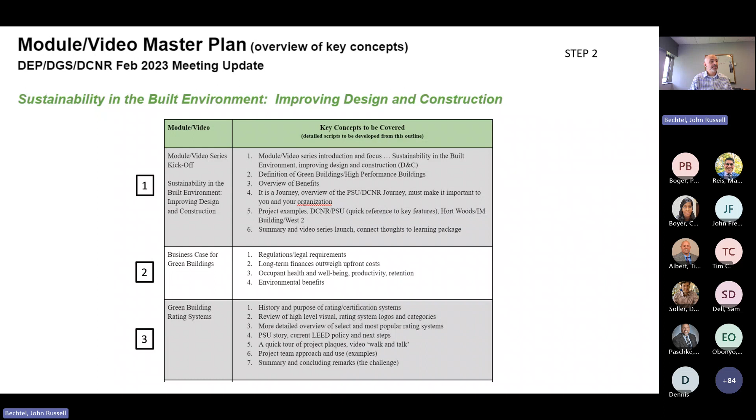to really frame out each of these. Are we covering the right topics that are necessary for a Sustainable Design and Construction 101 video series? So we did spend some time on this, working with our partners and making sure that we did have the right concepts across these 11 topics.

And then, of course, as a project manager, we had to develop a schedule. The first step, obviously, is the development of the script. After we got the topics outlined and the key concepts, we made assignments across all of our partners that we were working with, and we began to develop detailed scripts. So that was the first step before you would enter production of a video.

Of course, there's mapping out when the scripts were done. The scripts went through some level of approval process across the partnership. Once those approvals were done, then we would get into the studio. So from script to actually having a video to watch and review took months, sometimes 3 to 4 months. A lot of us were new at this, and we did learn a lot through this process.

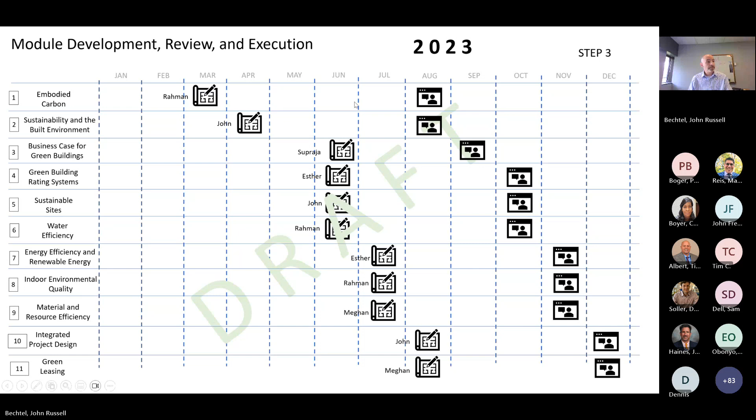And I'll show you some examples of some scripts that we developed, just quickly. And then I will show you a couple of excerpts of the final product to give you a feel for what we produced. So here's an example of a detailed script that was developed for the water efficiency.

Of course, timing was important in terms of trying to keep these videos to 5 minutes to 20 minutes, somewhere in between. At first, we thought they would all be short 6-7 minute videos. But as we started to tackle each of these topics, they grew in length. I think one of my videos was about 16 minutes. Trying to reduce that now.

But the timing and then who narrates it, trying to have a variety of speakers, making sure that they were interesting, and having the right experts to speak to them. And then having some type of visual as well, and not just speakers talking, but more of a lecture type with a PowerPoint with visuals coming up. And then detailed narration had to be developed for each of these.

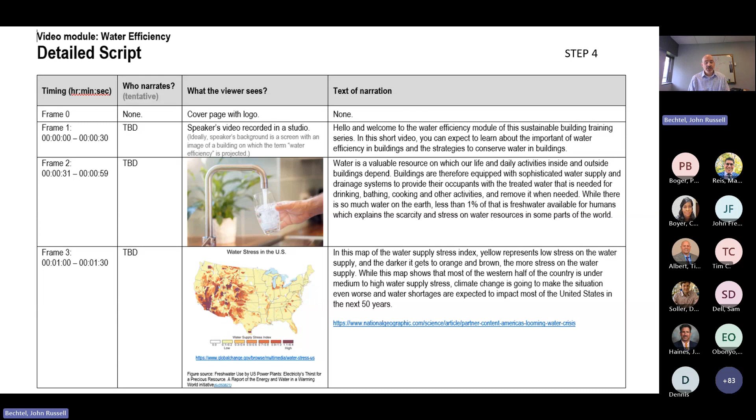So this just gives you an example of what kind of happened behind the scenes before we went into the studio to develop the actual video, to frame it out with visuals and then the exact content that you wanted to cover. And this is another one here, integrated project design. And you see some of the level of detail required there as well.

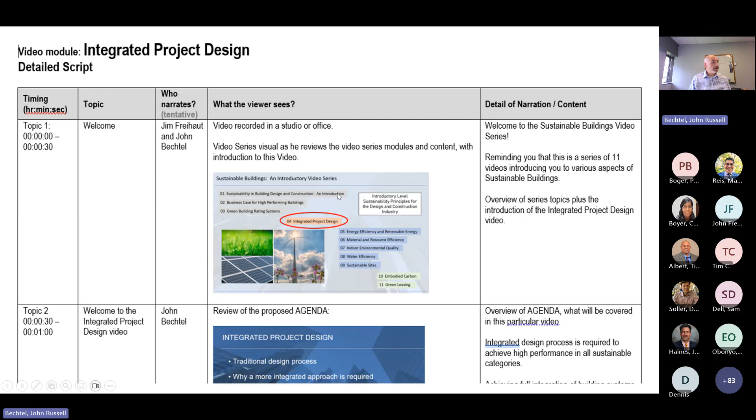And then I'd like to show you some of the final product. This is just a transition slide here. This is in our Icon lab here at Penn State, where we're trying to do a lot of our integrated project design for our projects.

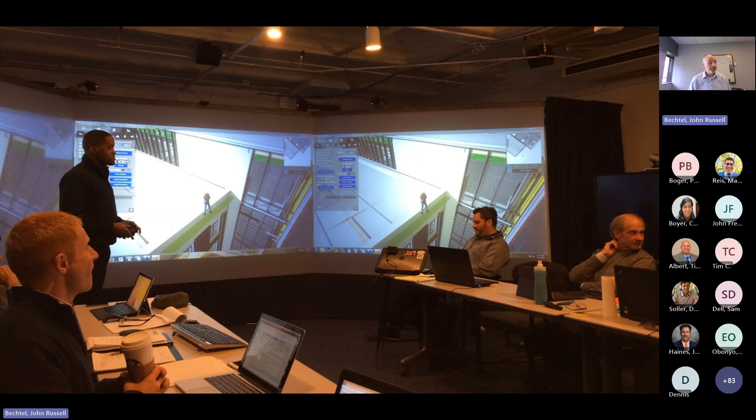So what I'd like to do now is actually show you some excerpts from the final products. First, I will show you an excerpt from the embodied carbon video, just to give you a feel for that one. And then I'll show you a minute or two of the integrated project design video. And Esther, if you wanted to chime in on anything there as I pull up these videos, feel free.

Okay, so I'll be the commercial break while he's doing this. Are you ready? Yeah, I'm getting there.

Yeah, so one of the things that we all realized is having the technical content and then delivering it effectively, those are not the same thing. So when John says it took a long time and several iterations, it was down to like going back to the studio 3-4 times, sometimes for large sections, other times for small sections. So we greatly appreciated the value of feedback and iteration because we could cut clips that we think could be worked on a little bit more until everyone was satisfied, both on our end and on the side of the client. Over to you, John. You got it.

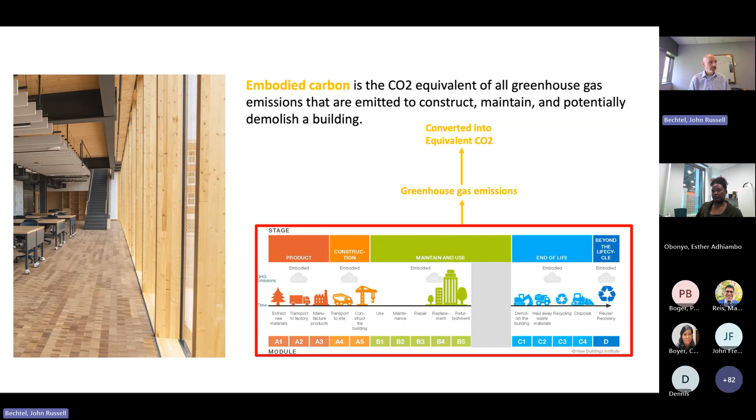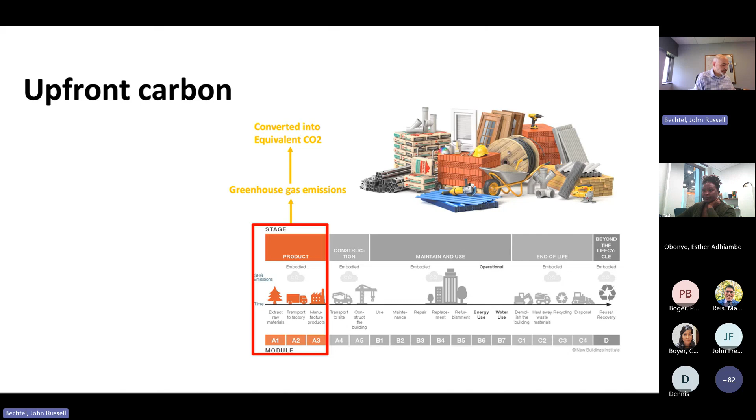Hello and welcome to the Embodied Carbon module of the Sustainable Building Training series. In this short video, you can expect to learn about what embodied carbon is, why it is important, and how we can reduce it in buildings. Embodied carbon considers all greenhouse gas emissions that are emitted in the full life cycle of the building, from extraction of raw materials through transportation, manufacturing, construction, maintaining and replacement, potential demolition, and its future life. As you might guess, every construction material has an embodied carbon figure or value attached to it, even before it is used in buildings. This is called upfront carbon or cradle-to-gate embodied carbon and includes all carbon dioxide emissions during the manufacturing processes of a certain construction material before the material is transported to the construction site.

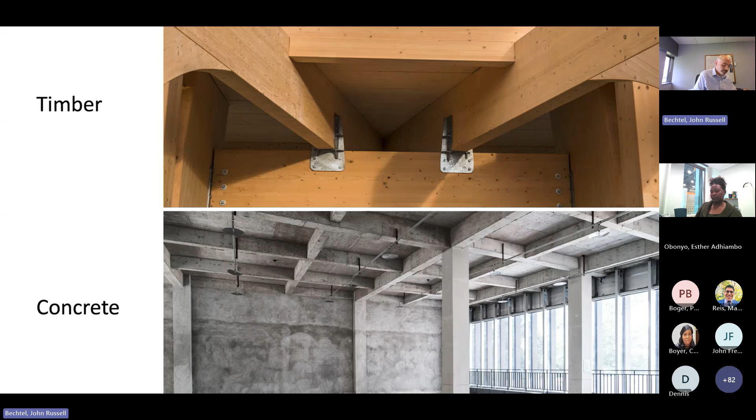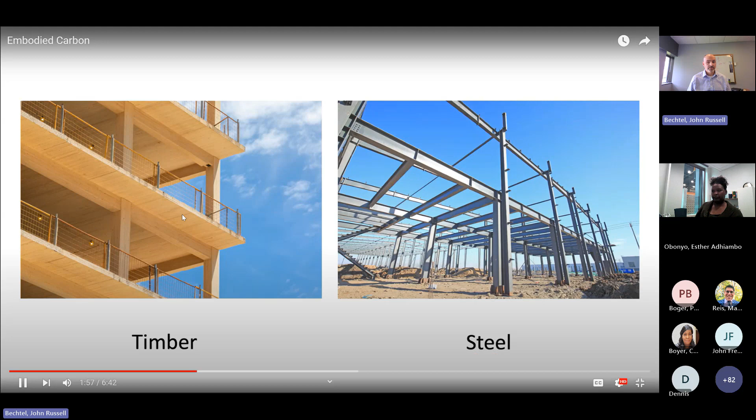Upfront carbon varies from material to material. A timber beam, for example, has lower embodied carbon than a concrete beam carrying the same structural loads. This is mainly because the production of timber is less energy and carbon intensive. Similarly, a building made with timber superstructure would have a very different embodied carbon than a building made with a steel structure. In discussions about embodied carbon, you also might hear about operational carbon. Operational carbon is different than embodied carbon, as operational carbon is about all carbon dioxide emissions from the energy and electricity we consume to keep our buildings warm, cool, illuminated, and powered. Operational carbon can be reduced by strategies such as making buildings super insulated and airtight.

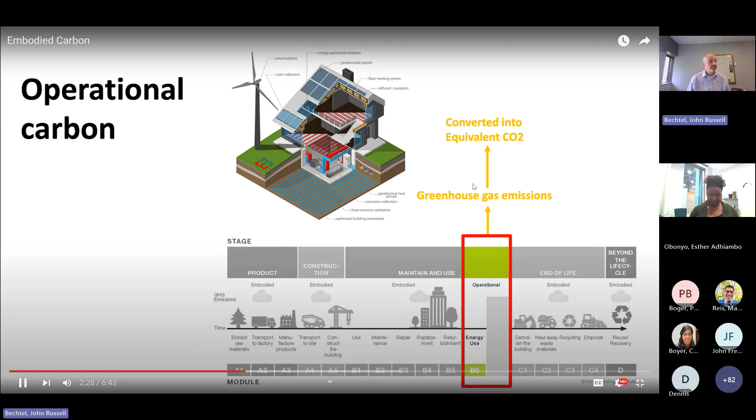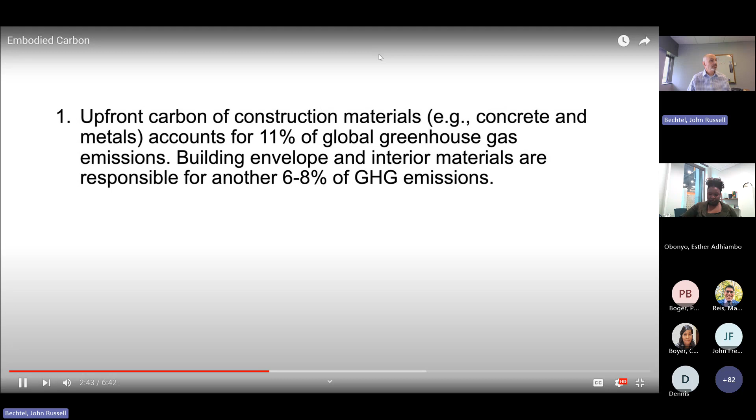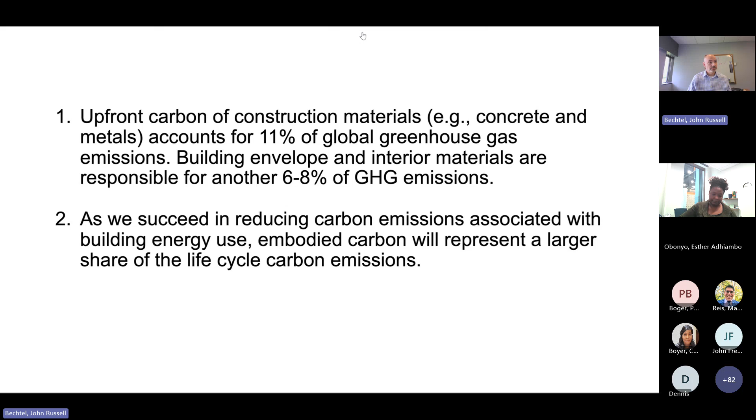The question is now why we should care about embodied carbon. The first reason is that the upfront carbon of materials used in construction, such as concrete and metals, is responsible for 11% of greenhouse gas emissions globally, according to the United Nations Environment Program data. Building envelope and interior materials are estimated to be responsible for roughly another 6 to 8%. The second reason is that the share of embodied carbon in buildings' carbon footprint is going to increase as buildings are going to become more and more energy efficient in future decades. For example, in a net zero energy building, between 75 and 100% of the life cycle carbon emissions will be caused by embodied carbon.

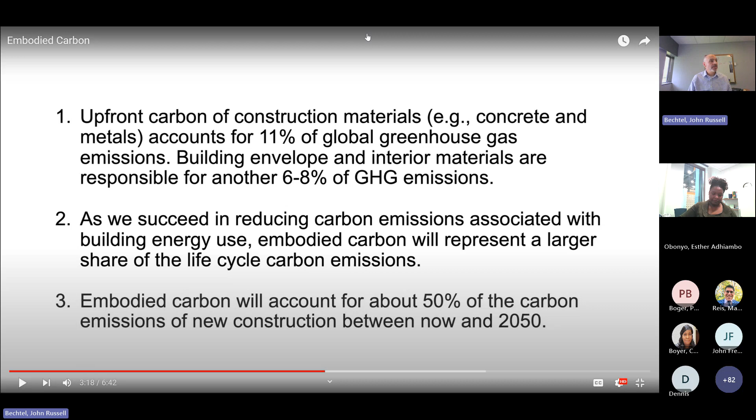Okay, I'll stop there. I just wanted to give you an idea of one of the videos. I'll stop sharing here.

You wanted to watch more, didn't you? I hope so.

Now we'll show an excerpt from the integrated project design video. And it's very difficult to watch yourself on video, but I'm going to try. So I'll share this one, just show you maybe a minute or two. And this is about 8 minutes in on this one.

One practice you can utilize on a project to promote a more integrated design approach is target value delivery, TVD, as promoted by the Lean Construction Institute, LCI. TVD is a disciplined management practice to be used throughout the project to assure the facility meets the operational needs and values of the users, is delivered within the allowable budget, and promotes innovation throughout the process to increase value and eliminate waste. For the purpose of this video, I will highlight some of the key TVD concepts as I share an example of TVD application on a project at Penn State. If you would like to learn more, please reference the LCI publication titled Target Value Delivery, listed at the end of this video. TVD establishes a project governance structure to ensure team integration and timely decision-making.

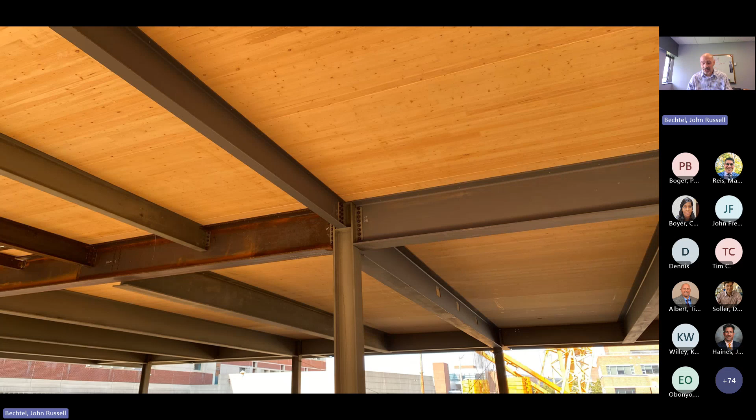And yeah, just a quick transition slide here. This is cross-laminated timber use on a project at Penn State, talking about embodied carbon. And our first use of CLT in lieu of metal decking on a project. And in fact, I think Esther's in this building right now. That's where her office is. This building is now finished.

Okay, back to the videos. So we're working on some promotional documentation for the videos that could go on the websites, for GreenGov or other website, where you can have access to something like this, where you can just click on the videos. They do build on each other, but you don't have to watch them in sequential order. I think you can bounce around as needed, but if you do watch them, it might be better to watch them from 1 to 11.

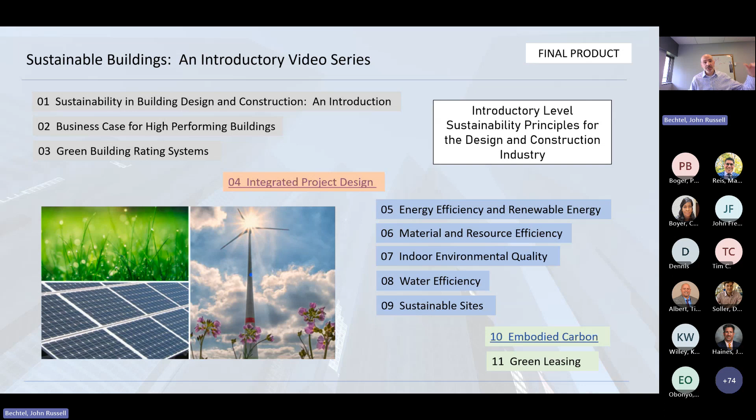But we are working on the promotional material being developed, and some of the key takeaways that I just want to reiterate, and others can chime in as we bring this webinar to a close before we open it up for Q&A. So just some key takeaways. This was a collaborative effort. A lot of people, so throughout the videos, as you'll notice, there are a lot of people speaking. We brought a lot of experts and knowledge into the content.

It is focused on 101 content. So if you're further along on your journey, these videos are probably not for you, but those teams that are starting their journey with sustainable building, design, and construction, that's the target of these videos. So it's Sustainable Buildings 101 content. As you noticed, this was a multi-step process to produce these videos, and quite eye-opening for those who haven't produced videos before. So we tried to get the right people in, and of course, as Esther mentioned, utilizing some students as well. We're happy about that, and of course, staff at Media Commons.

As mentioned, variety of speakers and content available in May, and we hope that you start your journey towards more sustainable buildings, and we hope that these educational videos give you a good start. So thank you. Turn it over to you, Matt.